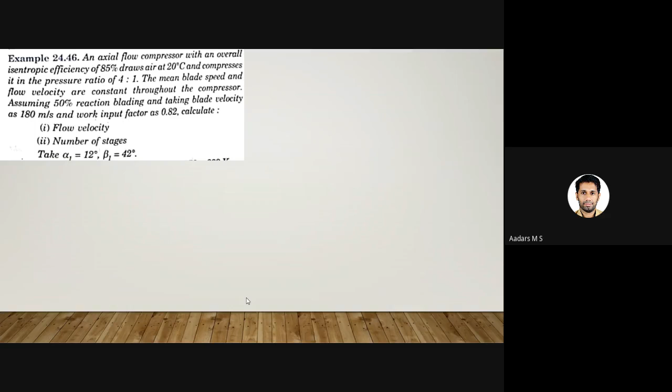So here is the given data. P2 by P1 is equal to 4. Blade velocity is equal to 180 meters per second. And work input factor, used for calculating power using the blade velocity equation. I will be applying the isentropic process equation for the process from 1 to 2 dash: T2 dash by T1 is equal to P2 by P1, raised to gamma minus 1 by gamma. From this you can calculate T2 dash, the isentropic temperature.

Initially the temperature is 20 degrees Celsius and the pressure ratio is 4. So we got the value of T2 dash as 435.4 Kelvin. In the question they have given the isentropic efficiency, so we can calculate the final temperature. Isentropic efficiency is the ratio of isentropic temperature rise to actual temperature rise. Using this equation, T2 is equal to 460.5 Kelvin.

For calculating the power using a thermodynamic relation, we need the initial and final temperature, mass and Cp. As the mass is not given, we assume 1 kilogram, calculating the work required per kilogram using mCp delta T. Cp is 1.005 kilojoule per kilogram Kelvin. Delta T is 460.5 minus 293, giving 168.33 kilojoule per kilogram. This is the total theoretical work by the compressor.

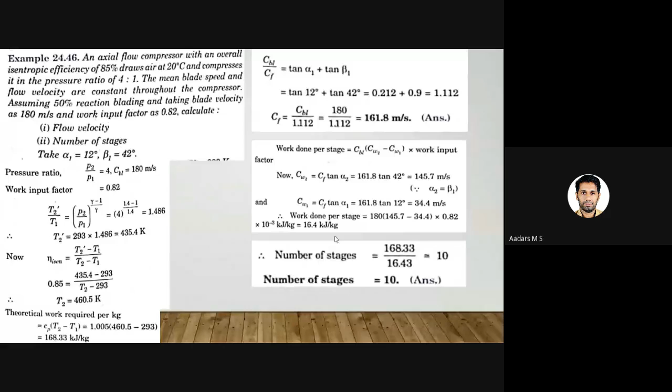So we'll go to our second question. If you have any doubt in this question, ask, or else I will go to the next question. Can I proceed? Okay.

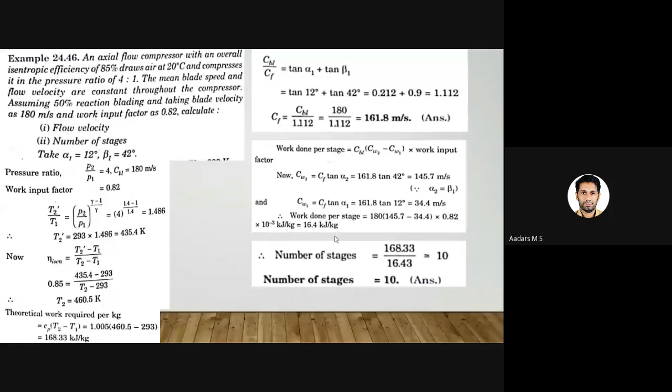So we'll go to our second question. In an 8-stage axial flow compressor, so in the beginning itself they have given that it is an 8-stage axial flow compressor. The overall stagnation pressure, they have mentioned that it is a stagnation pressure. So we'll be dealing with the static pressure and the stagnation pressure or total pressure. I have already mentioned why, in the reciprocating air compressor itself. We'll be dealing with centrifugal compressor. We'll be dealing with the static pressure and stagnation pressure.

Static pressure is the pressure at which the air is entering the compressor, and the stagnation pressure: while air is entering the compressor, air will have a velocity. Due to that velocity, the inlet pressure of the air is increased by a small value. Suppose P1 is the inlet pressure of the air entering the compressor, and C1 is the velocity of the air entering the compressor. Then the total pressure, stagnation pressure, can be written as P1 plus C1 square by 2. So the pressure, or the temperature, is increased by some value, that is called the stagnation pressure.

So in this question they have given the ratio of stagnation pressure. That is P01, and as it is an 8-stage compressor, we can write P08. So P08 divided by P01 is equal to 5. With an overall isentropic efficiency of 92%, isentropic efficiency is used for calculating the actual temperature rise. By using the isentropic equation, we can calculate the isentropic temperature rise. And by using the isentropic efficiency equation, we can calculate the actual temperature rise.

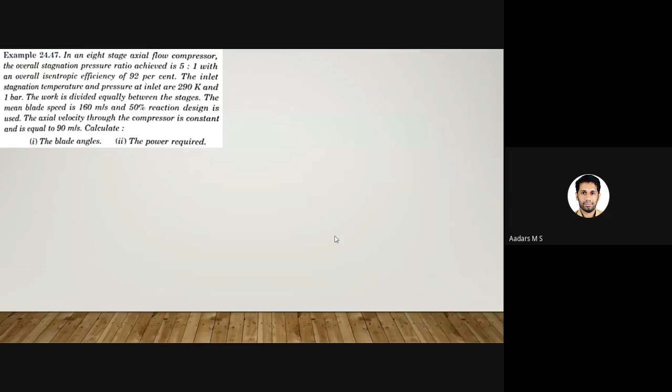Okay. The axial velocity through the compressor is constant and equal to 90 meter per second. Velocity of flow is 90 meter per second. Calculate the blade angles alpha 1, alpha 2, beta 1 and beta 2, and the power required. Okay. So these are the things we need to calculate.

So we'll be writing down the given values. N is the number of stages, 8, total pressure ratio 5:1, isentropic efficiency 92%, inlet stagnation temperature 290 Kelvin, stagnation pressure 1 bar, blade velocity 160 meter per second, degree of reaction 50%, velocity of flow is equal to 90 meter per second. As the degree of reaction is 50%, we can write alpha 1 is equal to beta 2 and alpha 2 is equal to beta 1. Okay.

First thing we will be calculating the isentropic temperature rise using the isentropic equation. They have mentioned it as T0N, as it is an N stage compressor. We can directly use T08. So in this question they have used just T0N. Okay, T0N dash. N dash means it is an isentropic temperature, so a direct vertical line in a TS diagram. So T0N dash, by using the isentropic equation, we can calculate as 459.3 Kelvin. Okay. So we got the value of isentropic temperature rise.

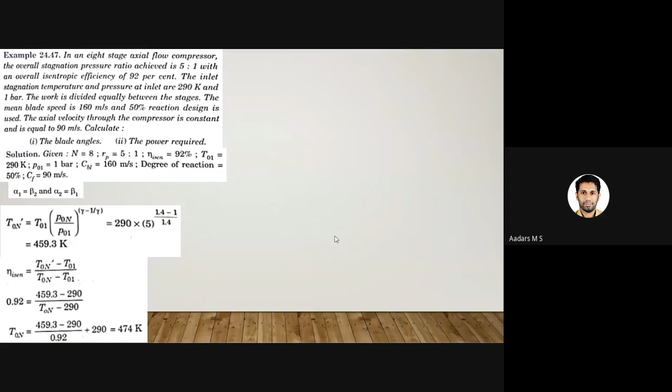Then next step, by using the isentropic efficiency equation, we can calculate the value of actual temperature rise. It is 474 Kelvin. This is the final temperature of the process. Okay. The next thing will be calculating the work done using the thermodynamic relation mCp delta T, and we'll be comparing with the work done by the blade velocity equation. m is not given, so we'll be assuming m as unity.

Cp delta T is equal to blade velocity into Cw2 minus Cw1 into number of stages. Okay. So in Cp delta T, T0N is the final temperature 474, T01 is given as 290 Kelvin, and the Cf is also given. We'll be substituting Cw2 as Cf tan alpha 2 and Cw1 as Cf tan alpha 1. Okay, and the velocity is given 160 and n is equal to 8. So you will be getting a relation tan alpha 2 minus tan alpha 1 is equal to 1.605. This is our first equation.

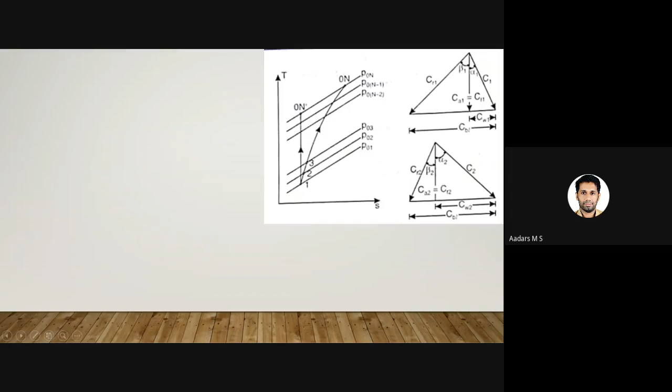Okay, then this is our velocity triangle. From the velocity triangle we can write tan alpha 1 plus tan beta 1. Here you can see tan alpha 1 plus tan beta 1 equal to Cw1 plus value, so total equal to Cbl divided by Cf. So tan alpha 1 plus tan beta 1 is equal to Cbl by Cf. So we can write tan alpha 1 plus tan beta 1 is equal to 1.778. Okay. This is our second equation.

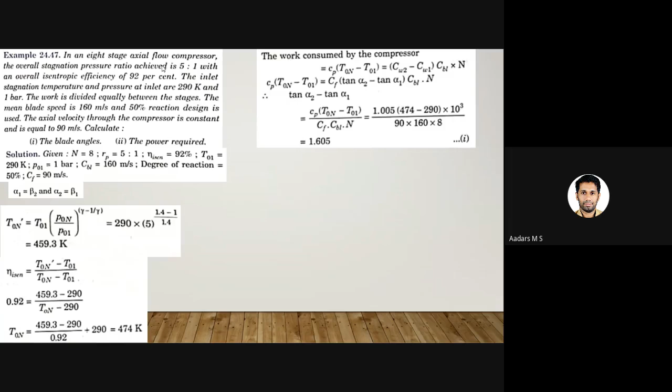We already got one equation here. Tan alpha 2 minus tan alpha 1 is equal to 1.605. And tan alpha 1 plus tan beta 1 is equal to 1.778. So we got two equations and three unknowns. As it is a 50% reaction process, we can replace alpha 1 with beta 2 or beta 1 with alpha 2. Solving these two equations, we will get the value of beta 1 as 59 degree and alpha 1 as 4.94 degree. So that's the first thing, we had to calculate the blade angles.

And second thing, we need to calculate the power required. It can be calculated using the equation mCp delta T. m is not given, so we'll be assuming m as unity, 1, and Cp 1.005 kilojoule per kilogram Kelvin. And final temperature minus initial temperature, 474 minus 290, gives 184.9 kilowatt. The power required. Okay. So we have calculated two terms, power required and blade angles. Okay.

So we'll move to our third question. Hope this will be clear to all. This is our third question.

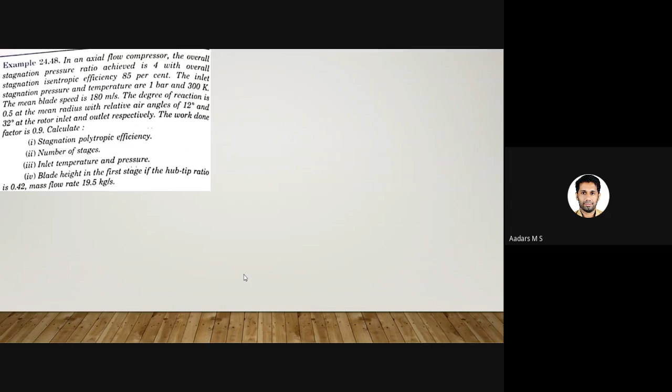Okay. So we'll be starting with the given data. Ratio of pressure P0n by P01. P0n means it's an nth stage. They haven't mentioned how many stages are there. So we are writing the equation P0n divided by P01 is equal to 4. Isentropic efficiency is equal to 85%. P01 1 bar, T01 300 Kelvin. Blade velocity CBL or CU is equal to 180 meter per second.

Degree of reaction 0.5. From the degree of reaction 0.5, we can write alpha 1 is equal to beta 2, 12 degree, alpha 2 is equal to beta 1, 32 degree. Okay. And the work done factor can be used for calculating the total work done. Hub to tip ratio 0.42, mass 19.5 kilogram per second. Okay.

So for calculating the final temperature, first we will calculate the isentropic temperature rise using the isentropic equation. T0n dash divided by T01 is equal to P0n divided by P01 all raised to gamma minus 1 by gamma, isentropic equation. And we will be substituting the value. We got the value of 445.8, which is the isentropic final temperature of the process. So isentropically the temperature rises from 300 Kelvin to 445 Kelvin.

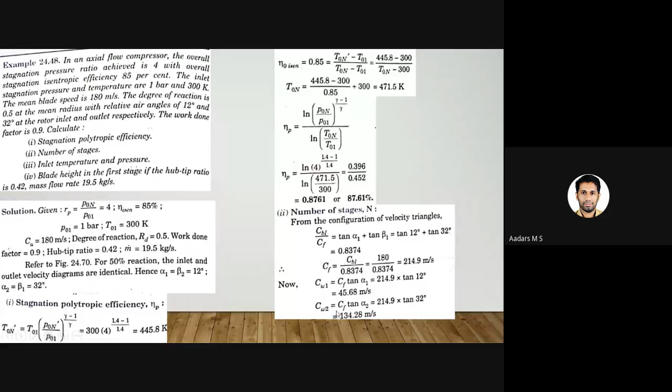So from this we can write tan alpha 1 plus tan beta 1 is equal to Cbl divided by Cf is equal to 0.8374. So Cf is equal to Cbl divided by 0.8374. We can write the value Cf as 214.9 meter per second. And if we got the value of Cf, we can directly calculate the value of Cw1 and Cw2, Cf tan alpha 1 and Cf tan alpha 2. So 45.68 and 134.28 meter per second.

So we'll be calculating the total work done: Cbl into Cw2 minus Cw1 into the work done factor. We'll be multiplying with 0.9. We got the work done as 14.35 kilojoule per kilogram. This is the work done with a single stage. And we'll be comparing this work done with the total work done of the compressor, that is 172.36 kilojoule per kilogram. Dividing this value, we'll get a value of 12 as the number of stages.

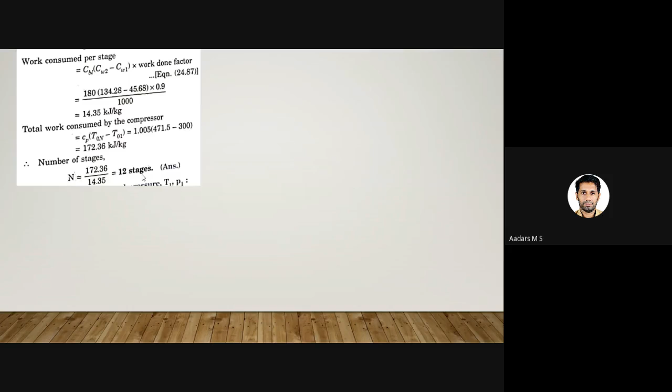This is the second part. And for the third part, we will be using the equation T01 is equal to T1 plus C1 square by 2Cp. The value of C1 can be obtained from the triangle. In this triangle, we know the value of alpha 1 and the value of Cf, so we can write C1 in terms of Cf and alpha 1. So C1 is equal to Cf divided by cos alpha. Once we have C1, we can calculate T1 by subtracting C1 square by 2Cp.

So this equation is based on our energy equation. mCp delta T is equal to m v square by 2. m gets cancelled, and we take Cp to the denominator: delta T is equal to v1 square by 2Cp. So we got the value of T1 as 276 Kelvin. And once we have T1, we can directly calculate P1 by using the isentropic process equation.

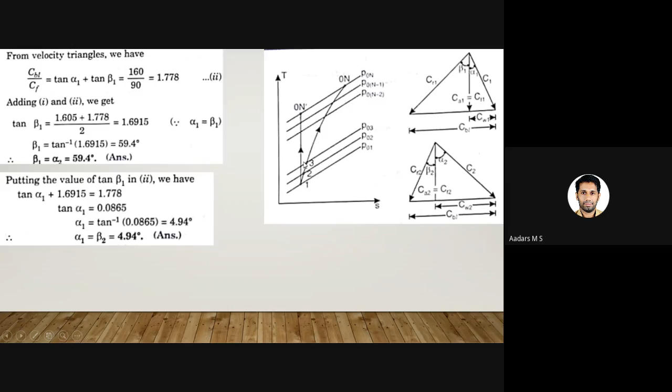So in this process, you can see point 01. This is P01, and vertically below that we can see a line called P1. Vertical lines are isentropic processes; entropy is constant. So we can directly use the isentropic relation: P1 by P0 is equal to T1 by T0 all raised to gamma by gamma minus 1. We got the pressure as 0.7469 bar. So we have calculated the third part also.

And the last thing, we will be calculating the blade height. As we are dealing with air, we can't use the equation of discharge. We'll be using the equation of mass flow rate: area into flow velocity into density. So we need the density. Density can be calculated using PV equals mRT, dividing both sides by volume. m divided by volume gives density, so density into RT is equal to P, and P divided by RT gives the density. We got the density as 0.9429 kilogram per meter cube.

And we will be substituting rho into area into velocity of flow is equal to mass flow rate. The area of flow, similar to our Kaplan turbine, is pi by 4 d square into 1 minus the ratio between inner and outer diameter squared, or pi r square into 1 minus the ratio squared. We can use both. Substituting the values, we got R1. The outer diameter is 18.18 centimeter. As we know the ratio, the hub diameter is 18.18 into 0.42, giving 7.636. This is the hub diameter.